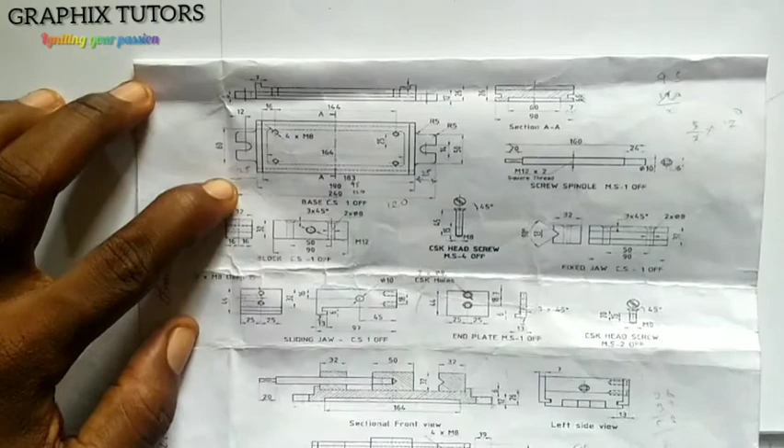We don't know the distance from this point to this point because it's not given here, but the good news is it is given elsewhere. From the beginning of this line here down to this point is given as 240. So I'm going to measure my 240.

So let's take that, I'll measure my 240, from here, that is from 1 to 25. So this is 25, somewhere around here. So my 25 is somewhere around here, that's my 25 there. Let's see that and see how it goes.

Now the next thing is the width. If you look at the width here, you discover that the width, or let me say the height first, the height will be given us from here to here.

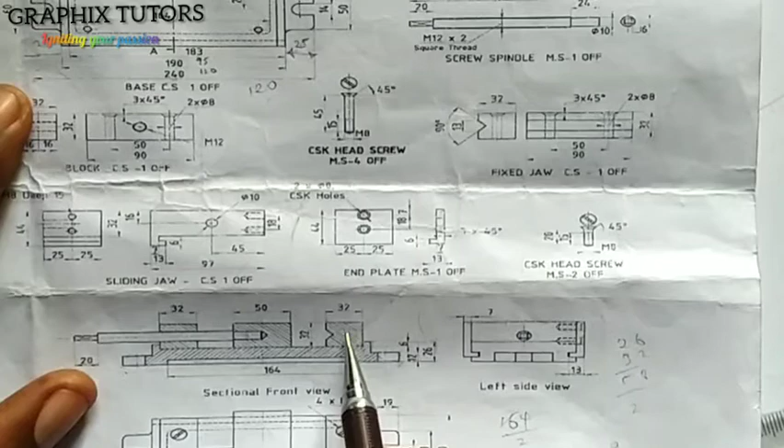From here to here is 32. From here to here is 26. So 26 plus 32 will give me 58. So I'm going to measure 58. From here the height is 58. I'm going to measure my 58 here. So from 1 to 68 is 58. It's 58 here, right? Now I've gotten my height.

And the next thing I would like to draw would be my width. Now the width is always given at this point here, because the plan always has the width. So what is the entire width here? If you look at this, it is 90. From this point to this point is 90, that is the 90 here. So I'm going to measure the 90 as my width.

So I'll measure the 90 as my width, from 1 to 10 is 90. You can see that, so this is 90 as my width. Now I'm going to take them up. So at this point, you take this up.

Vertical line. At this point too, you do the same thing, a vertical line. So in doing that, we're going to join all together, from here to here.

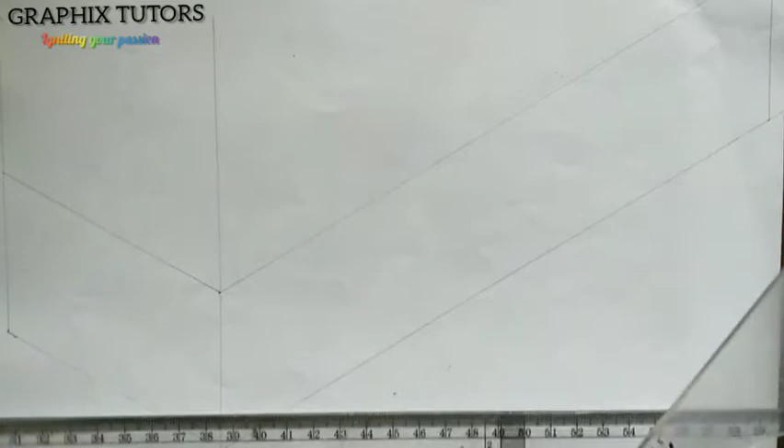I'm going to draw this to touch this guy. Also, I'll move this from here to also touch this guy here. I'll do the same thing too, move it from here and draw my line from this point straight down till I'll form my box. So from here also, when I make my box, let's take it down a little bit.

So I'm closing it up here for my box. Now I have formed the box I want. Look at it very well, the box is meeting at this point, and this is all the shape that I have here. Now the next thing we'll do here is that we want to draw this.

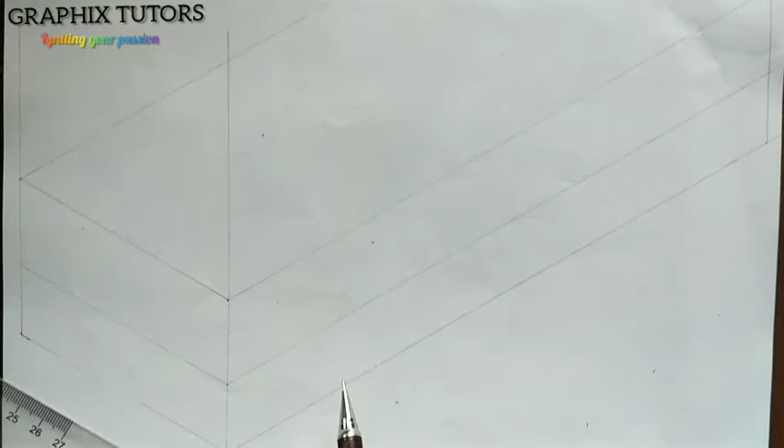So the 26 that we have, I will measure it here from 1 to 26, this 26 is here. Now close it up, just like that. I'll close the other one up, so I'm closing it up. I'm also closing this up. Alright, I'll close everything up.

Just join them. So we've done that, joined them all through. Now the next thing you do, to look at it very well, is get the center of this diagram, the center of this figure here.

So if from here to here is 90, half of it is 45. So this is 45 here, that's half of it. Now I'm going to draw it round. And see, 90. And this is 10, 20, 30, 40, 45.

So I'll close it up, and I'll close it up too. I'm dividing it into 2. Now, this is a center point here, this is another center point here. So the next thing, I'm going to divide here into half too.

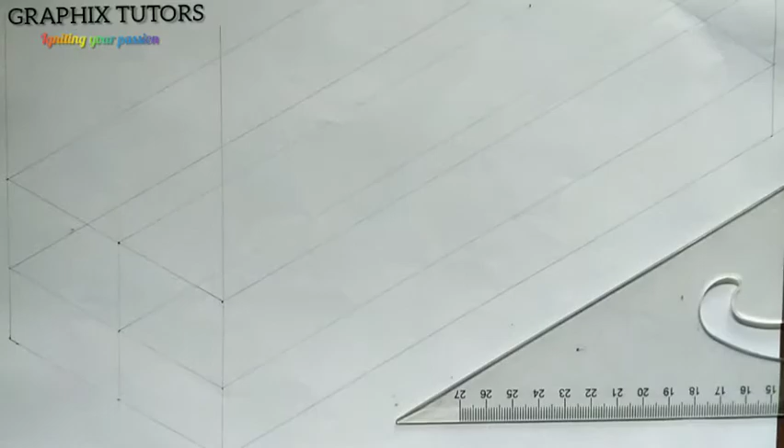The total length of that guy is 240, which is this. So half of 240 is 120. I'll measure 120 from here. From 1 to 13, 120. And I'll use my set square and T-square and trace it up. Now this is the center of this guy, so I'll close them all up too.

This is going this way, stopping here, and this top too, stopping here too. So I've gotten the center now. So I need this center point and the center point. So let's see how we're going to do that.

Now, if you look at this figure here, this center figure here, the distance of it we don't really know, but we know it is 50. Let me zoom in so it's clear what I'm talking about. From here is 50, that's the length. This next one is 32, so I'll start from the 50 and draw.

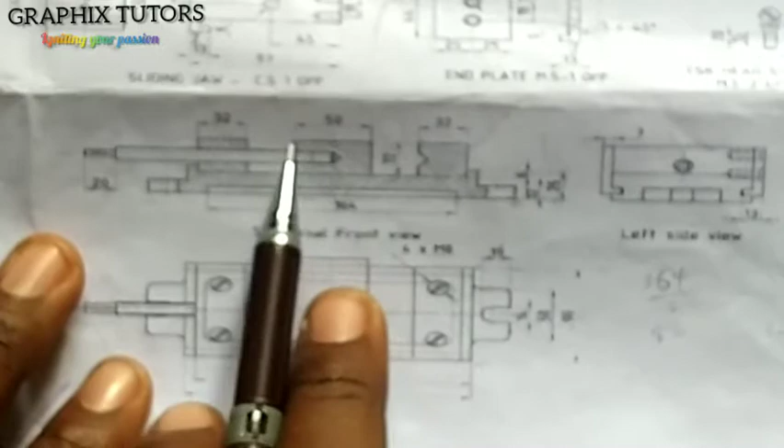So that will be 25, 25. With the help of my compass, I'm going to measure 25, 25. This 25 here, and I'll place it at this point. And I'm going to mark left and right. So that's the length. If you look at this, I have the length from here to here.

So what distance is from here to here? That is what we want to check now. So if you look at this figure very well, this thickness here, we already said the length of this guy is the length of this guy, which is 50. But we don't know the thickness here. How will we know the thickness?

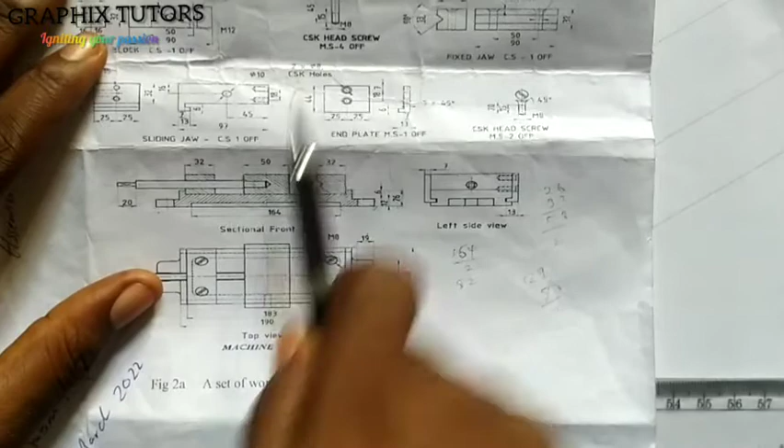This is the figure here, this thing that is assembled here, this is it here. And the length is 97. So I'll take out of 97 and I'll mark. See 97? So 97 divided by 2 is 48. So I'm going to measure the 48 from 1 to 48 here.

And I'll place it at the center here. So I'm going to mark somewhere around here, and I'll mark somewhere around here. So it means that I'm going to extend this from this point to just make it fulfill to this point here. That is where my box will end, so this is coming out totally.

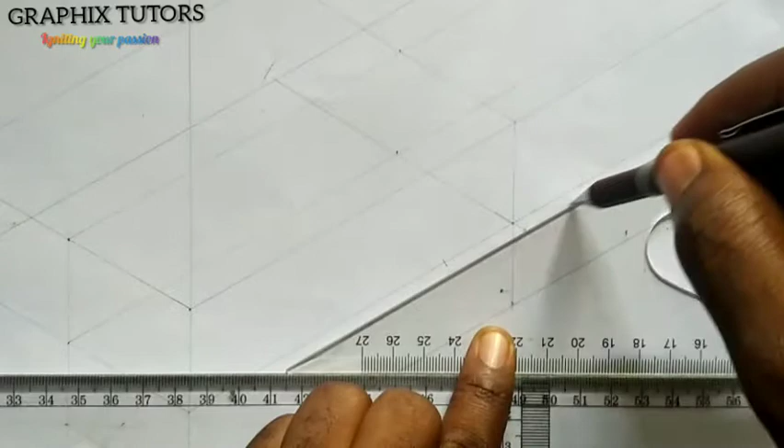Okay, and just closing them up. So we move up. I'm closing them up. Where they meet here, I have this way, and I also have this way. I'm using a faint line to draw first.

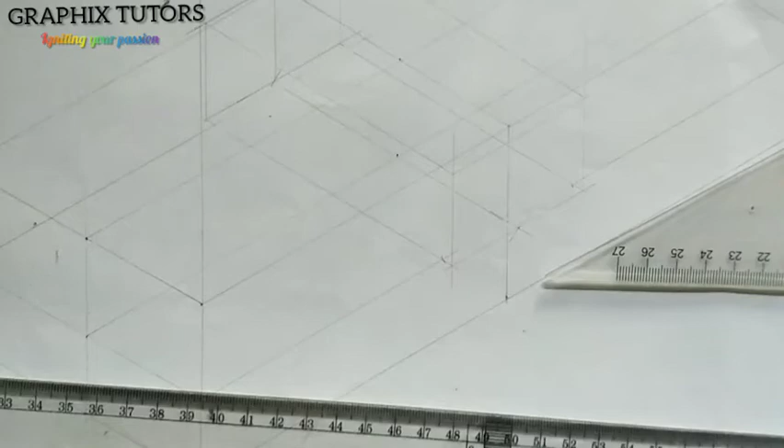Now if you look at this, you pick up here and here. This point is a point, this point is another point. Here is a point, here is a point. And that's the box I brought out.

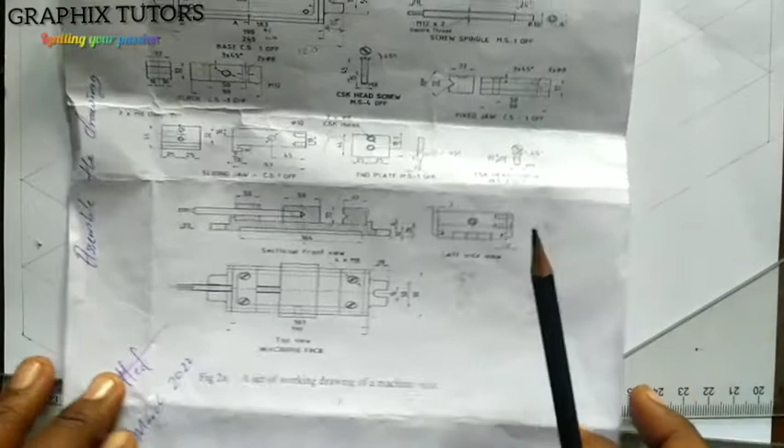Now let's move forward. From here, we need the next thing to do. Look at this now, the next thing I want to do is draw this base here. So what I will do is, I know that from here to here is 164. So half of 164 is 82. So I'll mark it from the center, 82. So this is the center here.

All together, so use my meter rule. I'm going to mark 82. From here to here, this is 82.

There we are, 82 here, right? I'll place it here. I'm going to mark here and here. I'll just move it up a little bit with my T-square, probably to this level, and this level.

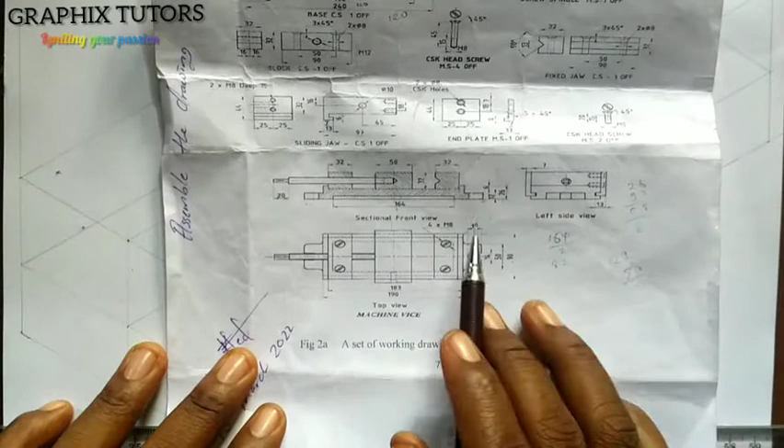Now the next thing we'll do after getting this, it's 84. We don't actually know the distance from here to here. For me to know the difference between here and here, I'm going to subtract 240 from 190. 240 from 190 is 50.

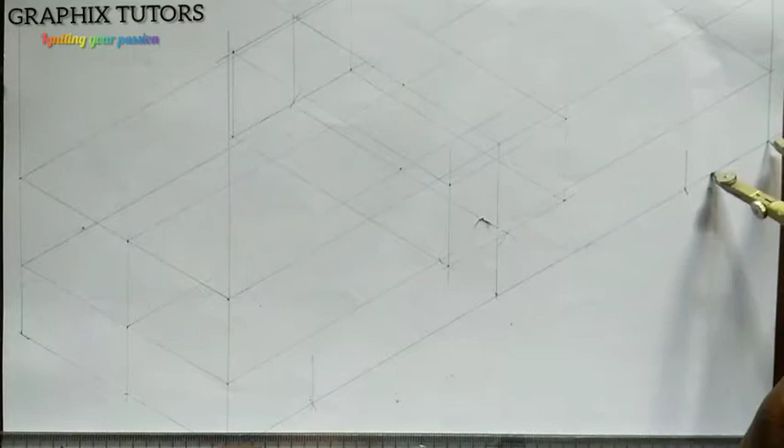So I'm going to measure 25, 25 from each ending. This is 25. I'll place it at the ending here. I'll mark 25, and I'm going to also mark 25 from each ending. So that will give me this thickness here. If you see, I already put 25 here.

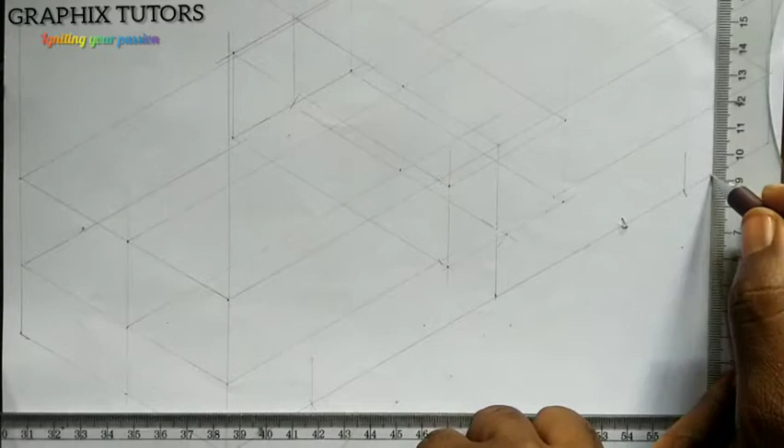Now the next thing we are going to do is from here to here, which is from here to here, and that is 7. So I'm going to measure another extra 7 in. This is 26 I measured. I'll just take it up and take the other one up too.

So now measure 7 backward from it, because it's touching the line of 26, the line I measured initially. So I measure 7 backward on that line here. This is 7 here, and 7 even here also. This 7 goes backward.

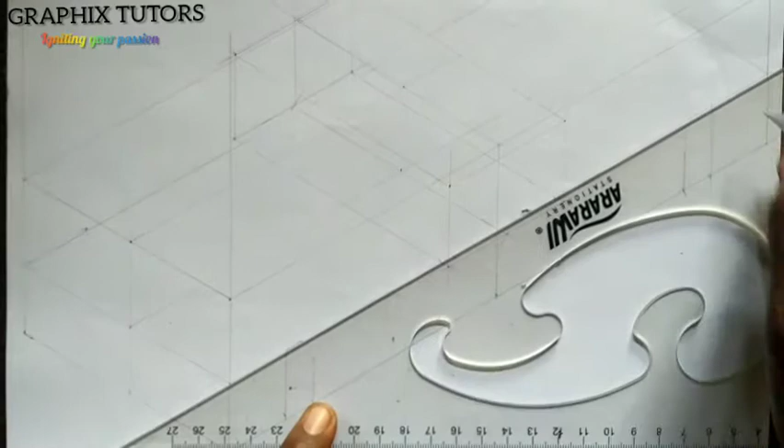So if I do that, I'm taking this backward this way. I'm taking this to backward this way. That's my 7. Now the next thing is the thickness here.

After I made 26, which is from here, this thickness from here to here is 26. The next one that is showing the thickness is just 12. So I'll measure 12. So on that 26, I measure 12. Let's go back down. So I measure 12 from here.

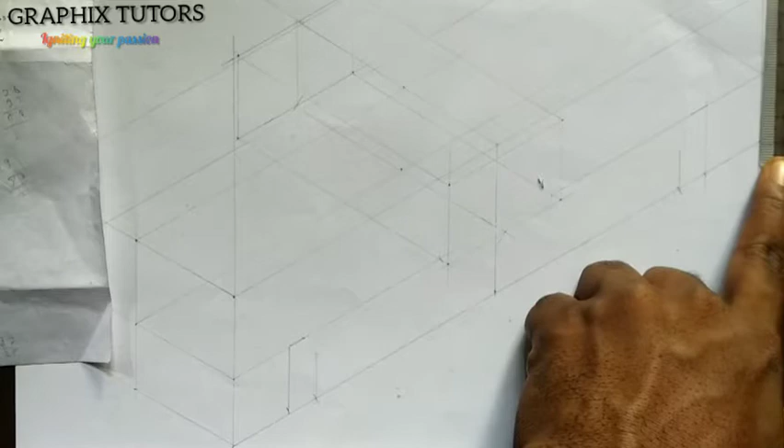I'll just join from here, front line. I also join from here to front line. Now the next thing is the distance from here to here.

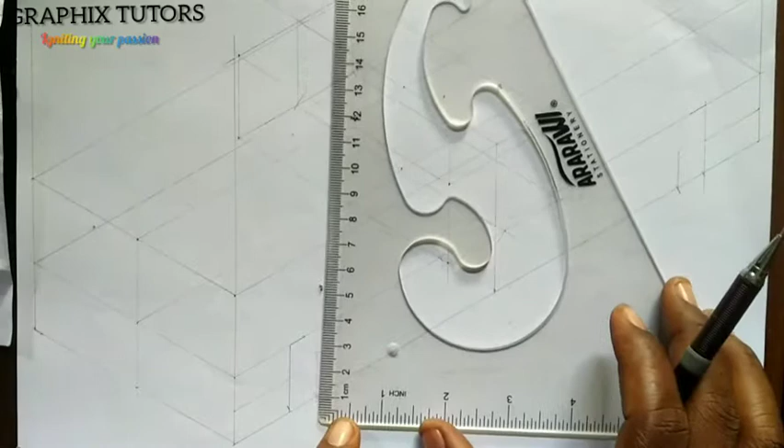From here to here is half of 12, and that is 6. So I'll measure 6 here. And I'll just join them together. I'll also use the front line.

So the next thing I'll be doing is this part here, 7. Let me show you. It's coming down to this point here by 6. So I'm going to measure this part 7 here. So come down by 6.

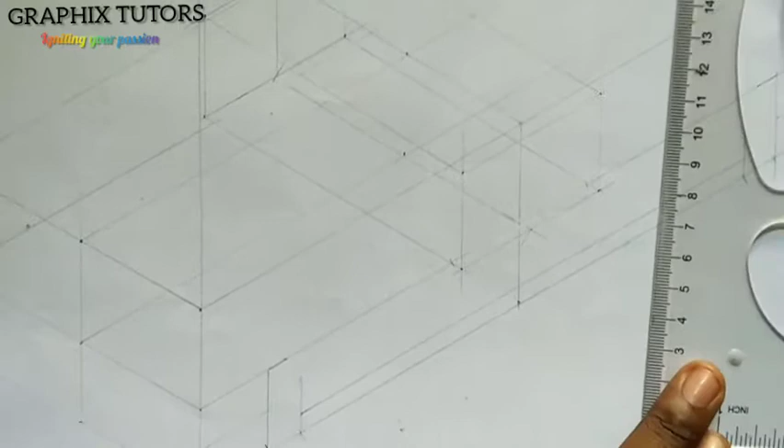And let's place this here. Come down by 6. 6 here. So I'll just join from this point straight down to this point and it stops here.

Now the next thing is from this 7 that I measured, I'm going to measure 32 here and 32 here. So let's measure it. First of all, measure 32 here, from 1 to 32. So I measure 32 here.

This is 10, 20, 32. Alright, I'll do the same thing here too: 32, 10, 20, 10, 20, 32. That is what I'm going to pull along up. This is coming up to this point. Here also is coming up to this point.

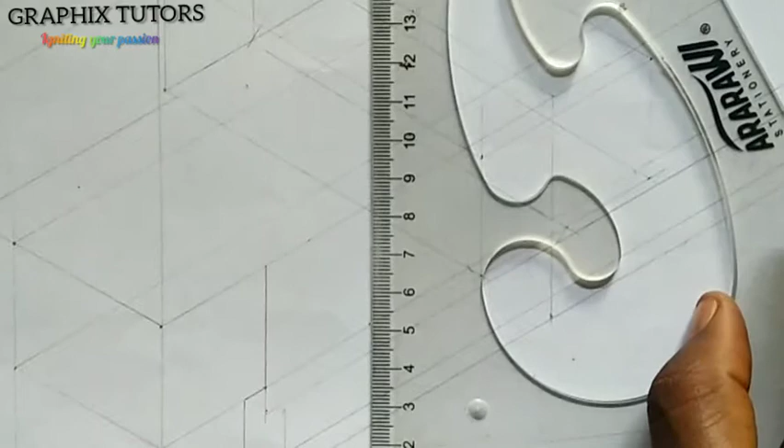Now, from here, you measure 32 up. So I'm going to measure 32 up from here. From 1, this is 10, 20, 30, 32 is here. Yeah, all good. So I need to form my box this way, and I'll close it up.

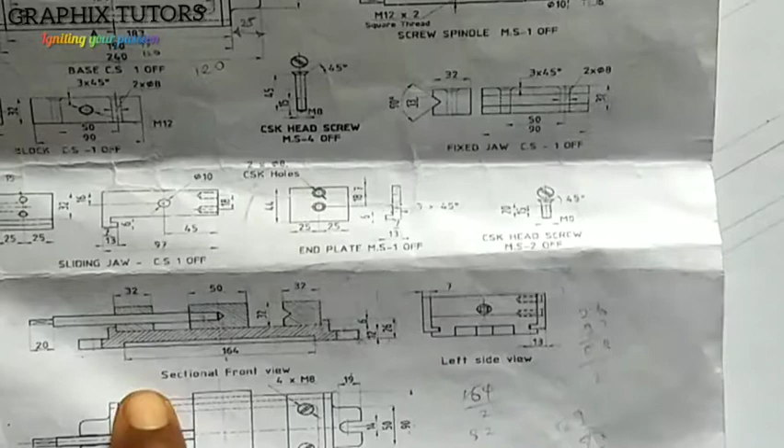To here is 90. So I'll place it here just to know where I'll stop. This is 90. Here also, I need to be somewhere around here, and here. So if I draw this to that point...

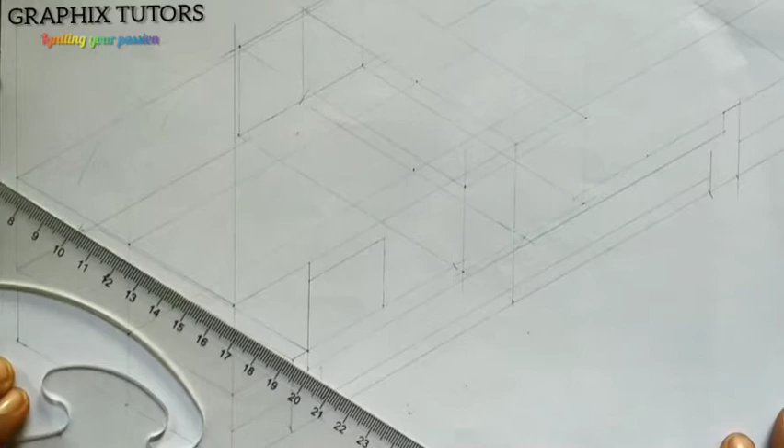Let's go. I'll move it from here. I'll measure this is where this guy stops, and you too, this is where you stop. And I'm going to close this to here, and bring it down to touch.

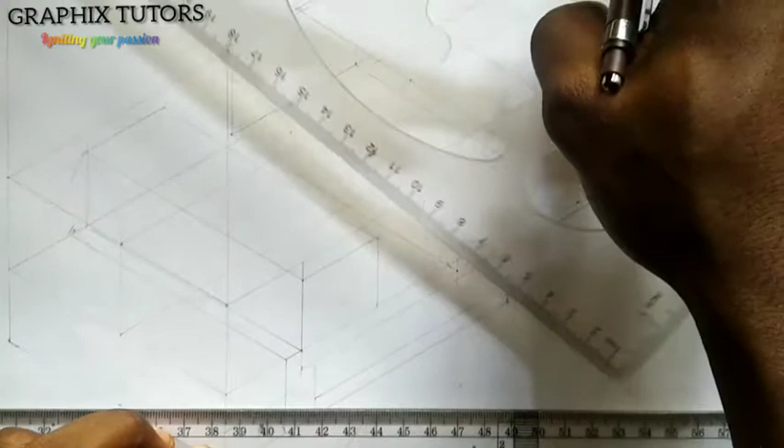Right? So from here, let's take this down. Now, we're moving forward, just closing that up.

I'm using faint line because I'm not sure where I'll go to end, where I'm going to stop. Now, after bringing all this out, this is coming straight down here.

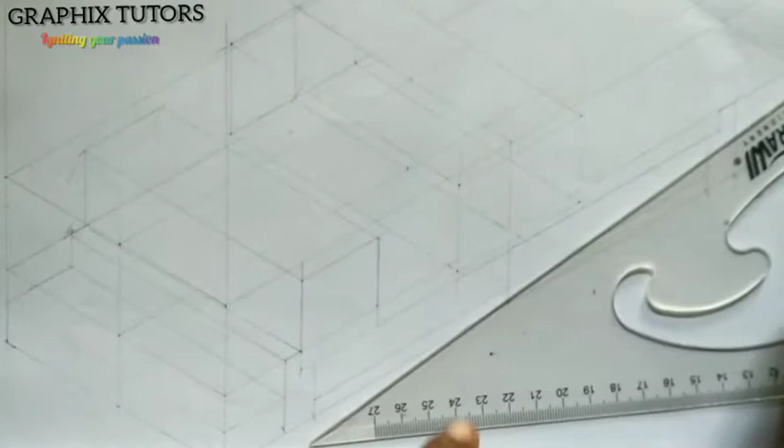So now the next thing is I will start drawing my diagram. I know for sure that I'm going to take in this top here, from here to here.

I'm taking this for you to you. I'm taking this for you to you. Taking this for you to you also. I'm taking this.

Then these two. I'm taking this one too. Taking here too. Close it up. Okay, I'll close it up.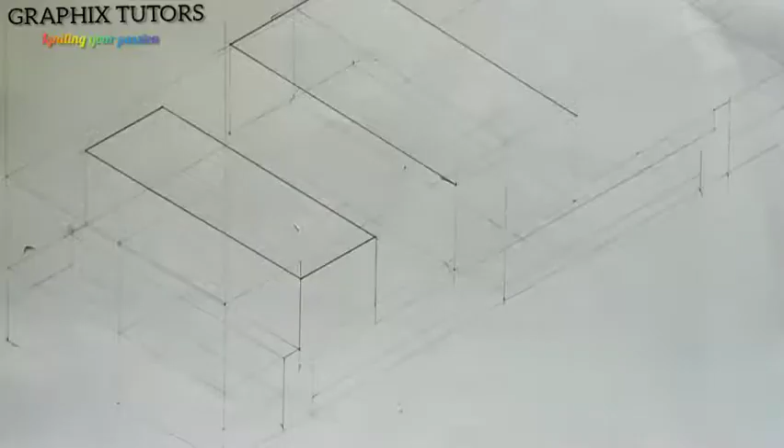Now, this is coming down. Then I'll take in here also. And here too. And here too.

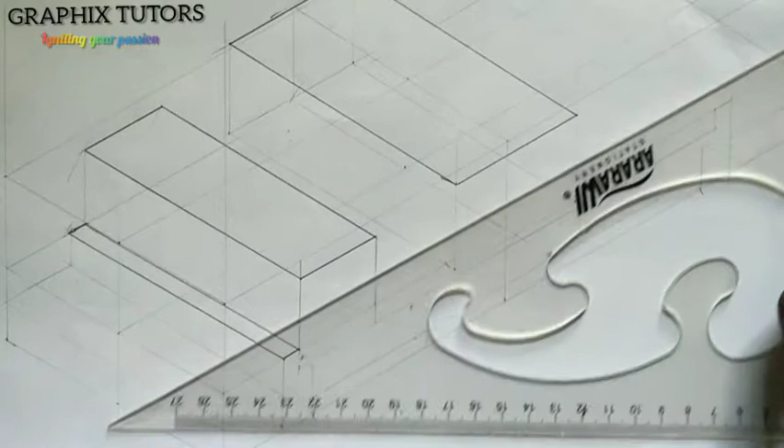Now, nothing of this, I'm going to draw this. This will come down here.

And the next one, this? So we have this. I'm going to take in that. At this point. From here too.

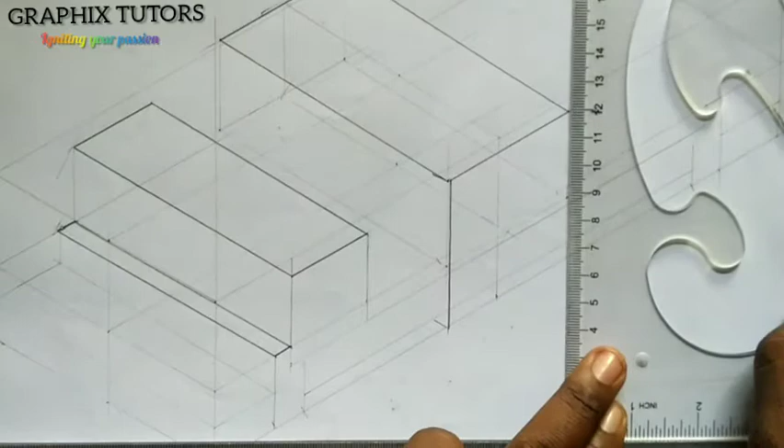So this is coming down here. From here.

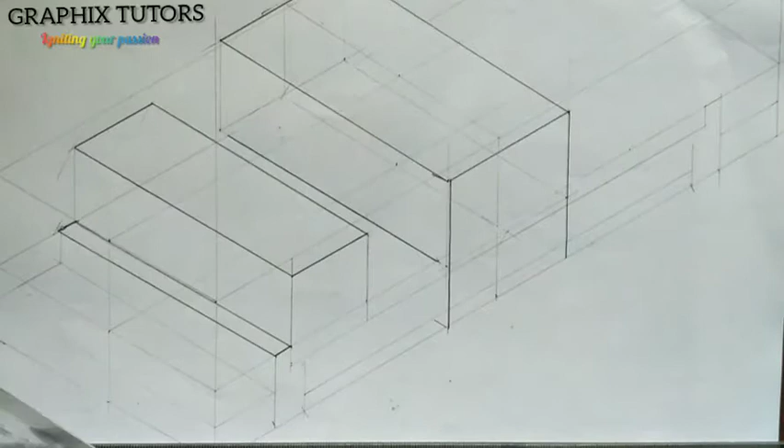Oh, now if I bring here down, this will come here, touch this, right? And this will come here, touch this. So, like that. And close it up.

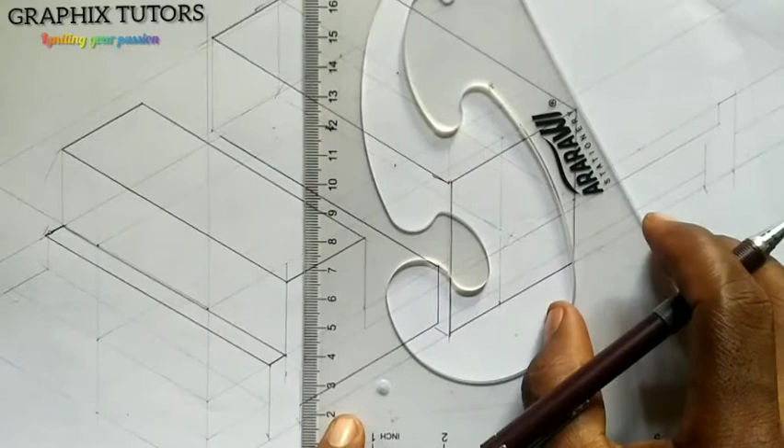Then the next thing I'll do, so bring it down. Then bring it down to this. So from here, I'll take it down. And then I'll move it to this point.

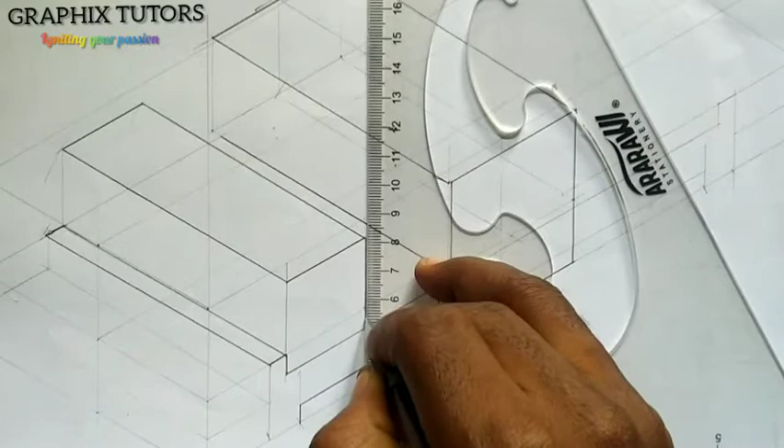Right? I'll bring it down to, and I'll bring it down also. Bring it down to now. From here, I'll take it in.

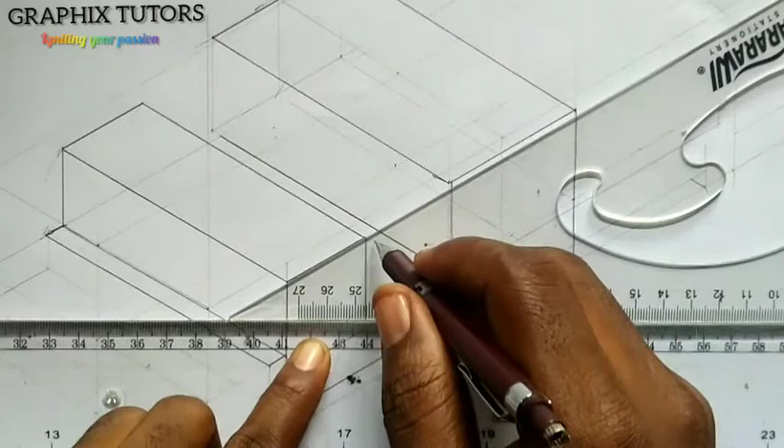The same thing that I did here, I'll also do it here too. So I'll just rotate this to this point. So from here, the same measurement I'm using.

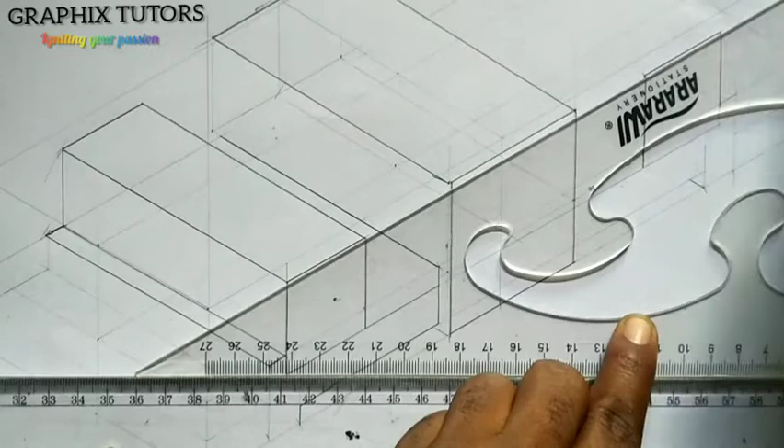This measurement here, the same thing I'm using here. So I'll just move this.

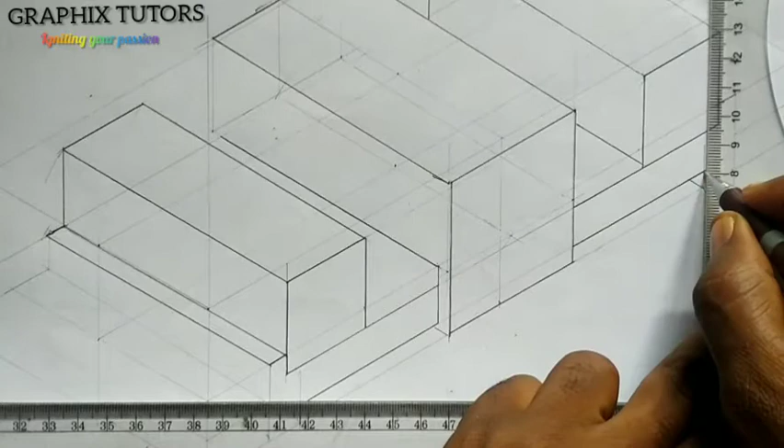So just close everything up. Close it up. Close it up. And here too. Then we bring this down. Okay, we'll move forward.

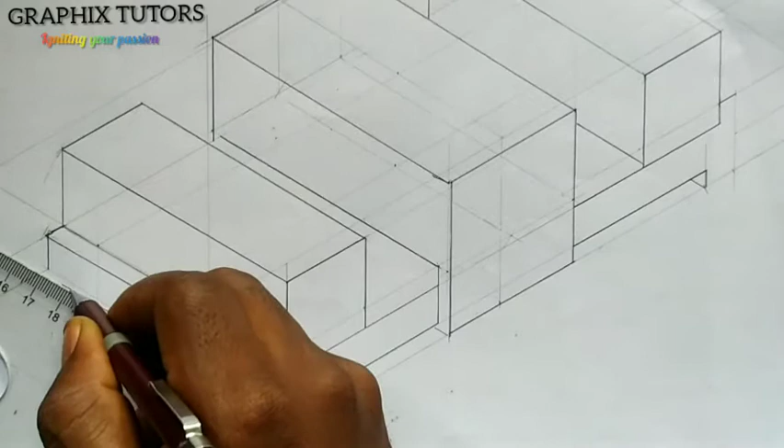So this is the center line here that I drew earlier. From here, the center line. At this point also is also a center line. That's what I mean, this.

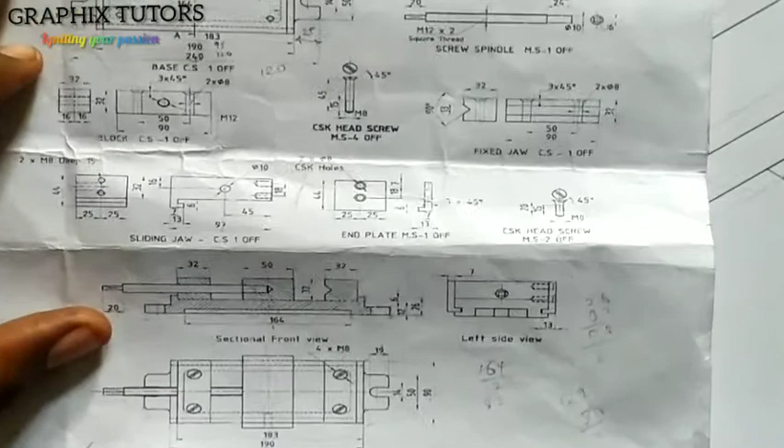There's another center line there. So we'll get the center of this line here so that we're able to draw our circle here. I'm talking about this pipe here. They call it a spindle, right? So we want to draw that, and it is passing through each of these holes.

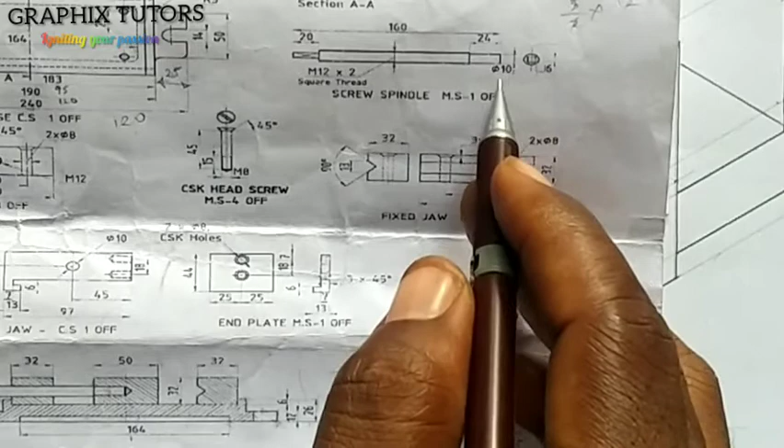That's what I want to do. But the total length of it is 160, right? So 160 from inside this block here. So how can I get that? It should be at the center of it. But the diameter is giving us what? Diameter is giving us 10. Diameter is 10, so I'll mark 5 each.

So you locate the center of this line. Let me see here, right? And we're going to draw a line this way. And you mark 5 each, 5 up and 5 down.

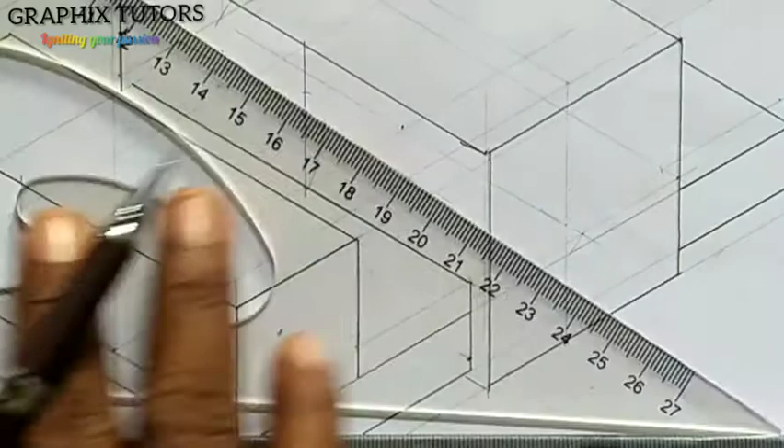You take the 5 up and down. All this, I mark left and right also, like that. So let me just close it up. Closing it up.

Okay, and let it pass through here. And through here, through here, and also through here. So what I'll do here is just...

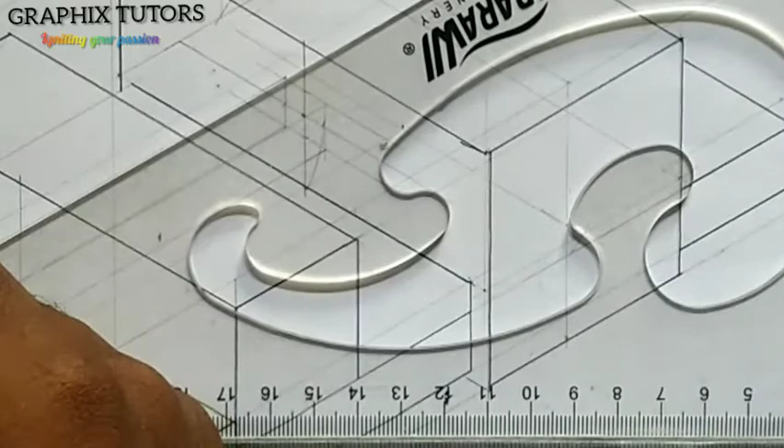So now what we'll do is the center will be applied here at this point. So we'll get the center. So the center of this should be somewhere around here. And say center of this line. There's 90, that'll be 45.

Okay, let's take it down, and they are all meeting at this point here. I'll just draw my line this way. And I'll project this.

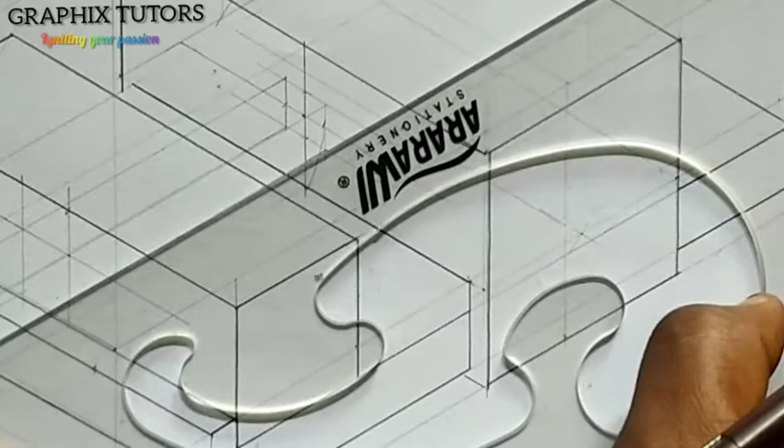So where this point meets here is one point, and where this meets another one is another point, and where this meets this is this, and where this meets this is this. So that forms a box.

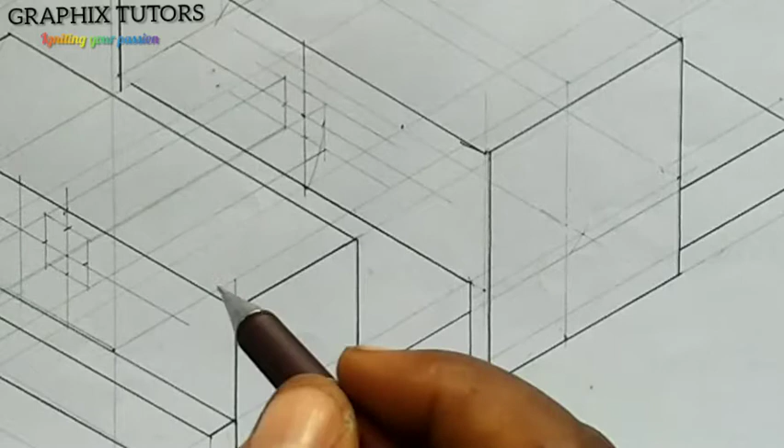I have this box out, and the next one is coming here. So at the point here, let's take it back.

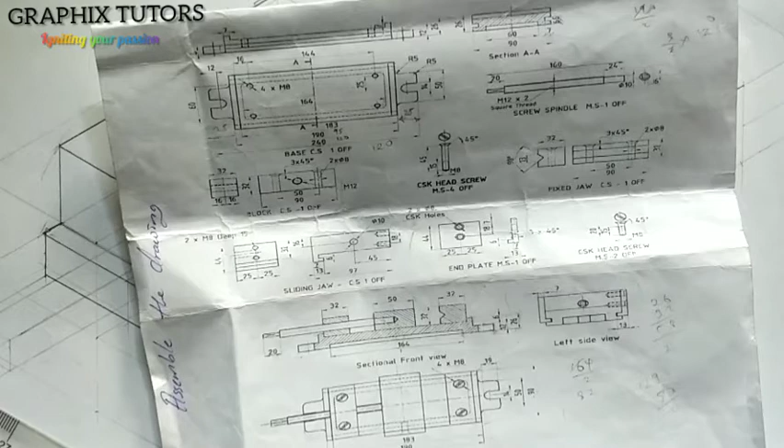It's passing out from here, so we're measuring 160 from the center here. So what length will it give us? If you move 24 from 160, remaining is 136. So I measure 136 from here.

Just somewhere around there, right? So let's move, I'll draw my circle here. I'll draw the circle here, and I'll draw the circle here. So I can use my French curve for that, normal isometric circle. This is passing through the center here.

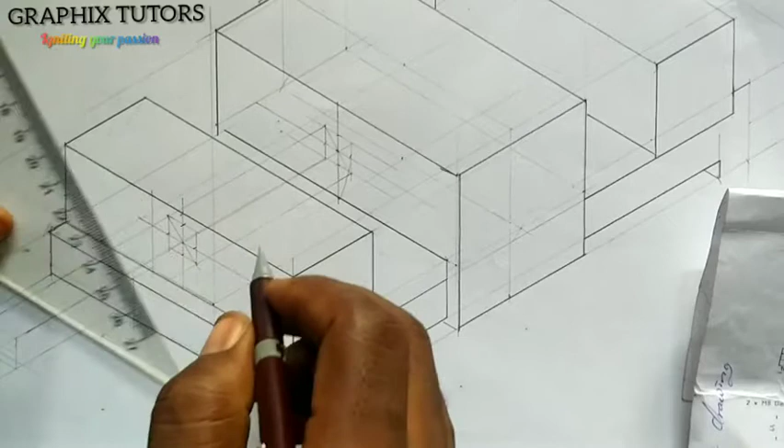Here also. Here also. So I'll get something like this. You're having something like this, and you join from this edge to this edge, to come here and stop here. And to come from here, stop here. Right? And this one too.

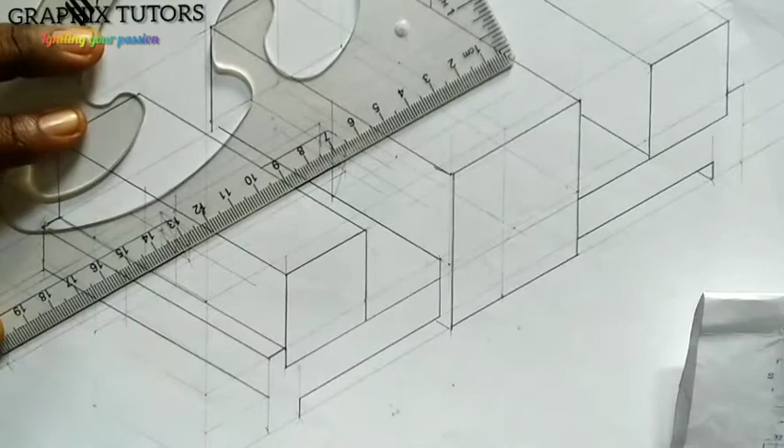Come here, stop here, and come from here, stop here. So from here, we're having something like this, right?

Now this side here is a square, you can check it from here. It's telling us that it's a square inside. And the square, this is 16 millimeter, 16 millimeter, or 16 millimeter. So I'll have that.

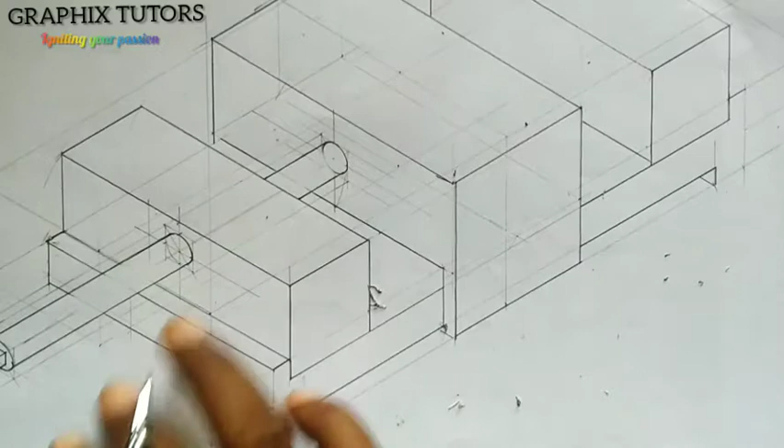We have this, we have something like this. And the next thing we want to do is draw this thickness here. I want to draw this, which is this, right? So if you look at it now, the thickness is 50. I'm going to mark 25, 25, and also 14, so 7, 7, 25, 25, and 7, 7.

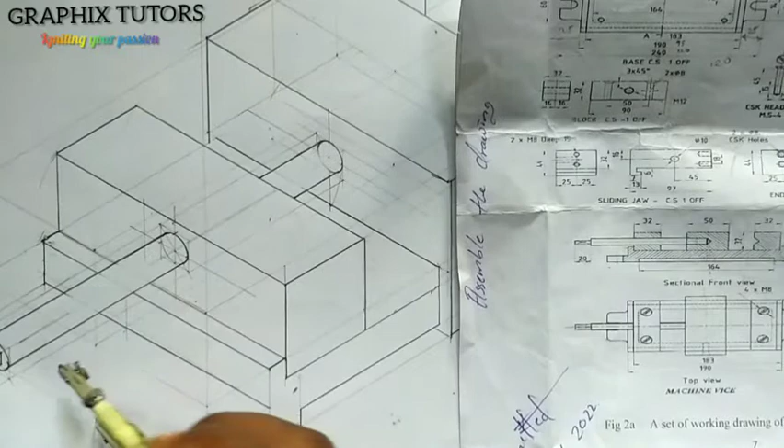So I'll just take my compass, mark it, first of all 25. Place it at the center here, I'll mark left and right, 25 and 25. Then the next one is 14, 14, that is 7, 7 now. So I'll mark 7, 7.

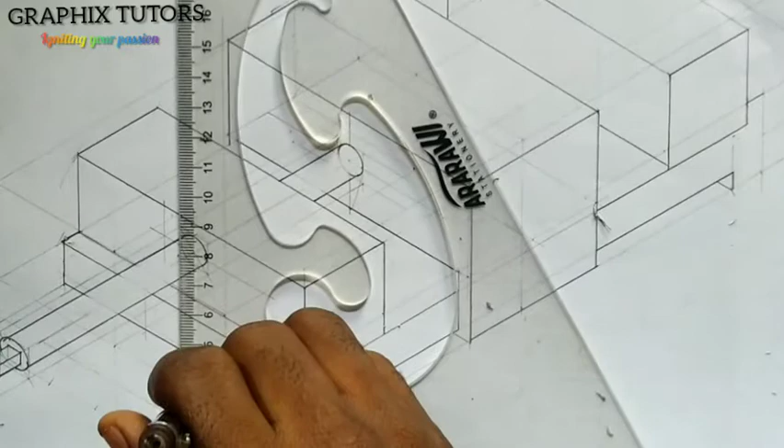So the next thing, we move down to the 12 we measured. Where is the 12 we measured earlier? This is the 12 we measured earlier, this thickness here. So you just take them to this point, take them to this point, and we take them inside.

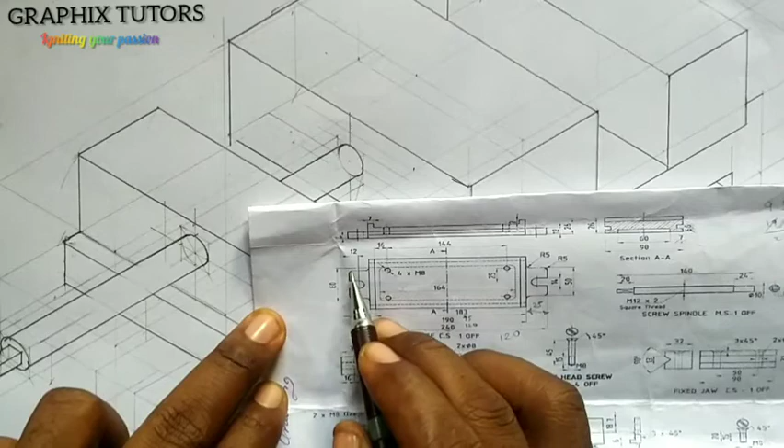This corner, now what do you notice here? You notice that at this point, distance from this beginning to the center is 12. Distance from the beginning to the center is 12, to this point is 12. So I'll just draw my line. That's where I'm going to draw my circle, so I'll complete the rest.

They're all chamfered at the edge, and use, they're all chamfered at the edge. So I'll chamfer at the edge here. This is small, so I'll be having this.

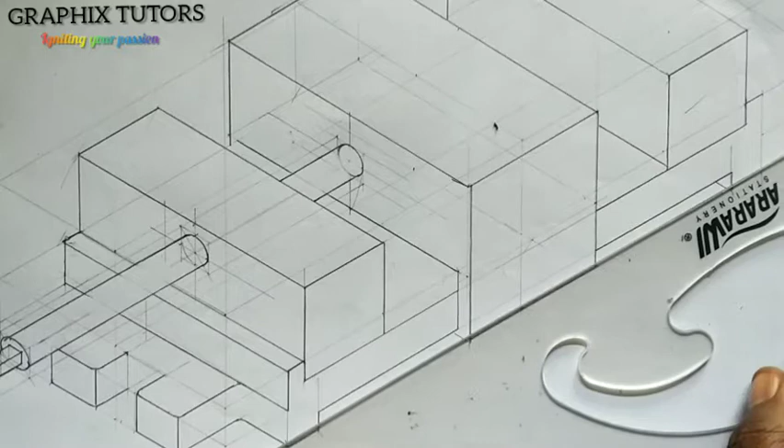So from here, from this side, just do the same thing here. Do the center line here, this will help. So we measure what you have here, and this point, and this point.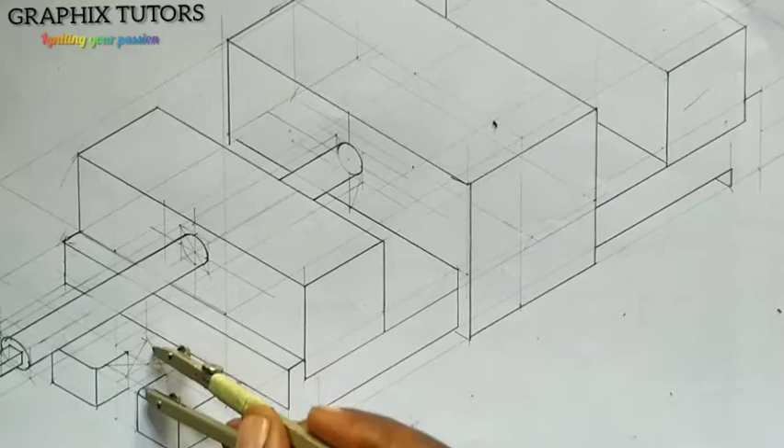So let's close them up. To close them up, we have a connection, so you take your pencil, place it at this point, and draw this. Right? So you place it here. Okay, that guy. We have something like this, right?

Now the next thing is to do the back one here. So for the back one, the same thing we apply. The center line that we have, we mark 25, 25, like from here to here. And then let's measure that, the same replication here. So say it's 50, so 25, 25 that you measure.

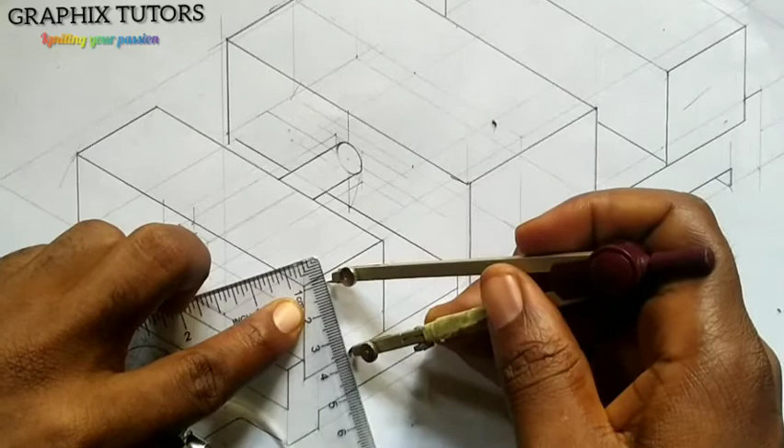So I have 25, 25. Place it here, you mark left, right, then 7, 7. Left, right, so it does the same thing you did there. Let's take this in, take this in, take this in, take this in.

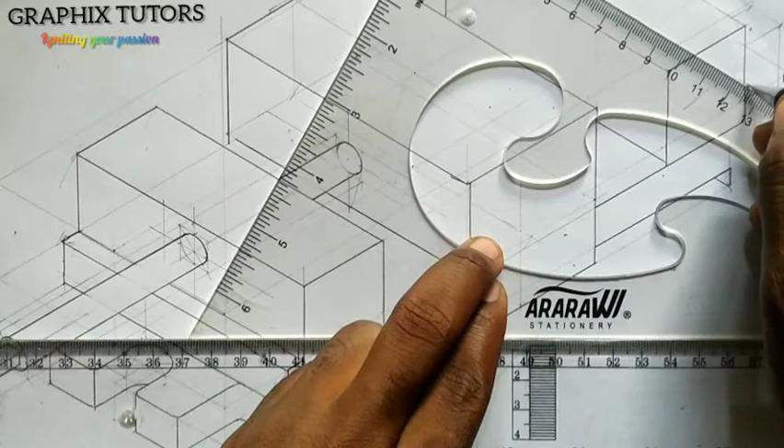So we just bring it down. This is actually solid. This is the thickness here. Close it up. And then

we have this, and this. So now we move forward, that is what we have here. Let's have this.

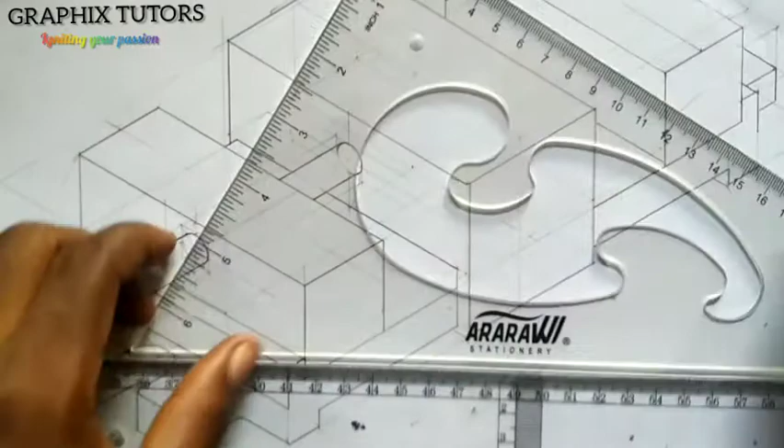Let's close this up, 16. Measure 16 from here, measure 16 from here. I'm trying to draw these bolts here, 16, 16. Then at the center point, you're going to have 4M8, right? So it's M8, 8 times 3/2, that is 12. So you come here and measure 12 for each.

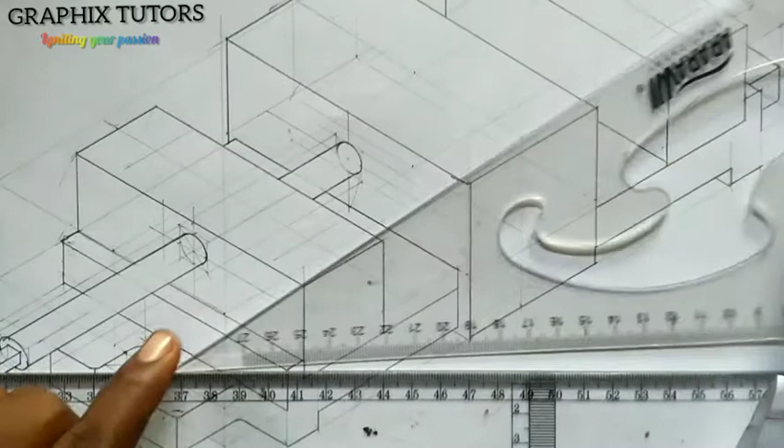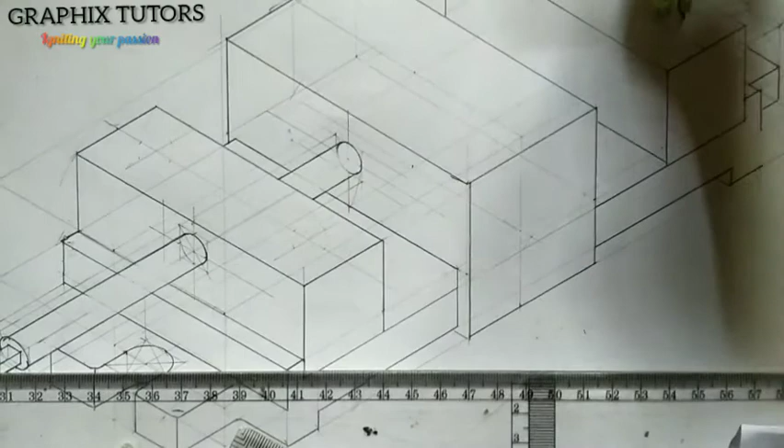I can do it here. So I just measure my 12 on my meter rule. That'll be 6, 6. So I measure 6, 6, 6, and 6. Also here 2, 6, and 6, 6, and 6, 6, 6, 6, and 6, 6, 6, 6, and 6. I'll have this.

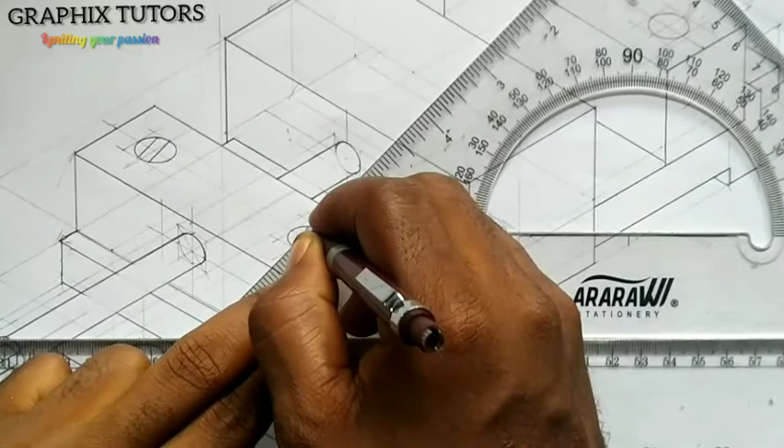Just from your normal circle here to get your, you do the same thing to get your circle at those points. So after doing that, we will have the curve here, somewhere around here. So this is what we have.